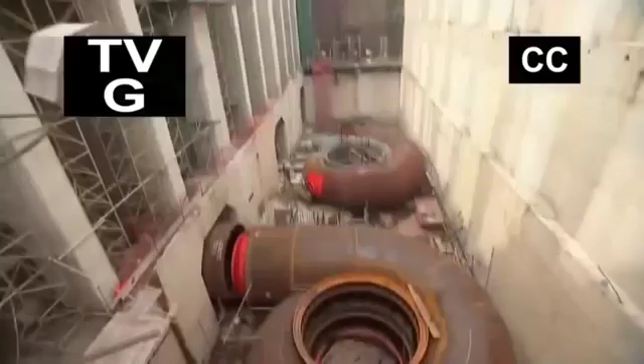As an architect, I travel the world investigating some of the most amazing design projects ever attempted. Right now, I'm going to take you behind the scenes of the most important construction project in Brazil. In the next few years, Rio will host the Olympics and the World Cup. But before the city takes the world stage, Brazil has got to fix a major power shortage. Brazil had one of the worst blackouts in history, leaving over 60 million residents without power nationwide. A crew of 3,500 is hard at work on one of the largest hydroelectric power plants ever built. To generate enough power, the team is taking a river with more water than the U.S. uses in a single day, and they're moving it.

If you hit a mountain, you go through it. Exactly. To reroute 16 miles of river, they're blasting their way through 7 mountains, creating the largest tunnels on the planet. So we've got to remove this rock obstacle. Yes. We're not using a shovel to do it, are we? With all eyes on Rio, Brazil is determined to keep the games from going black.

Welcome to Rio de Janeiro, the crown jewel of Brazil. Located in the southeast corner of Brazil on the Atlantic Ocean, Rio is home to 6 million people, the second largest city in South America. This city is famous for Carnival, the single largest party in the world, samba dancing, and Christ the Redeemer, the enormous iconic sculpture perched atop Corcovado Mountain.

Soon, Rio will be known for something else, as only the 3rd city in history to host both the World Cup and Olympic Games back-to-back. The entire world will be watching this city when over 4 billion people tune in to see the games. The problem is, Rio may not be ready because this city suffers from blackouts. Just 1 month after winning their Olympic bid, Brazil suddenly went dark in one of the largest blackouts in human history. For 5 hours, 60 million people were without power. With 750,000 tourists attending the games and over 2/3 of the planet watching on TV, the people of Rio are desperate to keep the lights on.

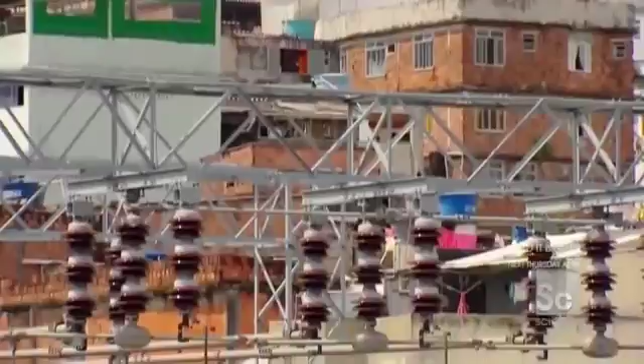So as someone who's from Brazil, what does it mean to be a part of this bid, of this Olympic Games? That's a unique opportunity, right? Because if we didn't win this time, it wouldn't be probably in my generation that this opportunity would be open again. So this is a bigger event than Carnival? Way bigger. Carnival's the biggest event in Rio. Yes. So this will be more lights, more people. More lights, more people, more tourists, more buses, more infrastructure running the system.

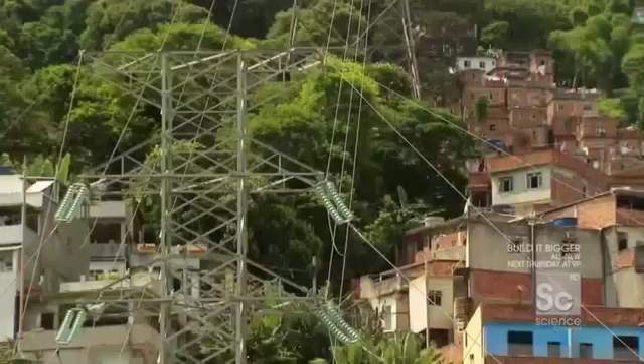Yes. The city has less than 4 years to generate enough energy to power 2 marquee events. Their solution lies 3 hours north of the city, where they're building a massive hydroelectric power plant deep in the mountains.

So I've just arrived in the town of Sapucaia, and I'm about 100 miles outside of Rio. And this town, sitting on this body of water, that's the site for the new hydroelectric project. One of the largest infrastructure endeavors on Earth. The Anta and Simplicio project is a job site larger than Manhattan. Workers here are reshaping some of Brazil's most difficult landscape in order to harness the energy from this, the Paraíba do Sul, a nearly 700-mile-long river that will supply the hydroelectric plant with enough water to fill 1,000 football stadiums.

But the location of the river is the project's greatest challenge. Now, the issue is if they put the hydroelectric plant right here, the reservoir required to feed this plant would cause a big flood. A flood so large that it would destroy all of the forests here and require this entire town and 2 others to have to relocate. So instead of moving the people, what they're going to do is move the river.

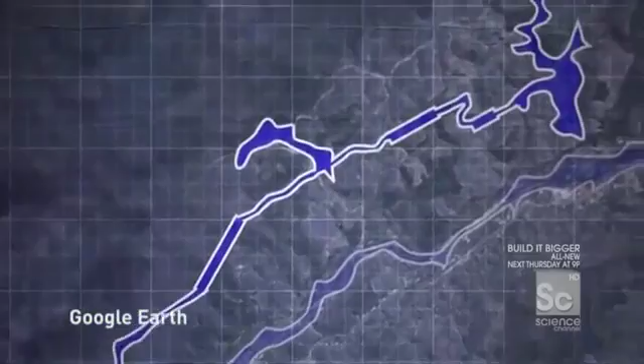To save the town of Sapucaia, engineers are doing something incredible: changing the course of 16 miles of this winding river in one of the largest water-moving efforts since the Panama Canal. Starting with a dam, they're diverting the river through 13 canals, 5 reservoirs, and tunneling through 7 mountains. Water will safely flow towards 3 of the most advanced turbines ever built.

So the concept basically is you have a river running here, but you need to put it over here. Yes. In between there are mountains and valleys. If you hit a mountain, you go through it. If you hit a valley, you build dikes. Exactly. Simple to say, the concept is simple. Build is very complicated. Very complicated, I imagine.

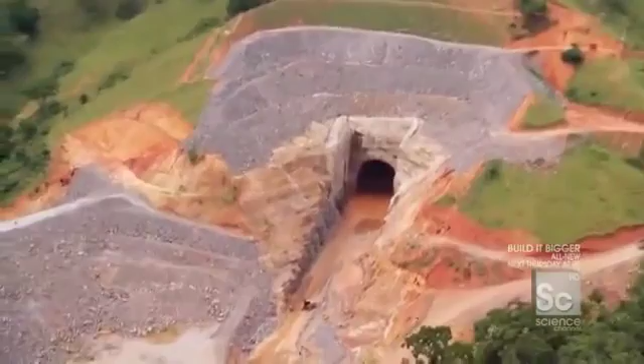In order to handle 780 billion gallons of rushing water, these tunnels need to be some of the widest ever created. If they're too narrow by even a few feet, the water could back up, causing a devastating flood. Right now, I'm heading into the mouth of tunnel 3, the very largest tunnel.

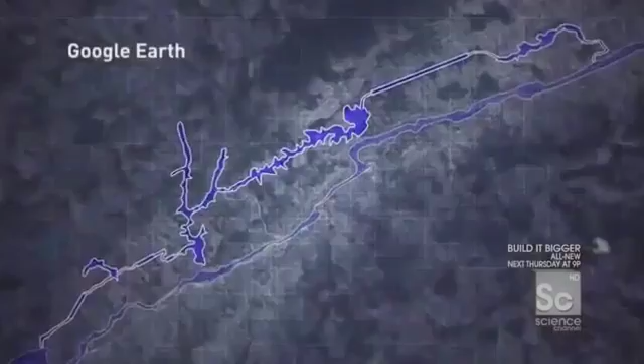Having been on a number of tunnel projects before, I have never seen a mouth of a tunnel this big. This is the longest of 7 tunnels, spanning nearly 4 miles. The further you drive in, the farther you get from daylight, and the darker and weirder it gets. In total, workers have to remove over 45 million cubic feet of rock, enough to cover Central Park in over a foot of earth.

With the weight of a 240-foot mountain above, the team has developed a safe way to build one of the largest tunnels in the world. It's a 2-step process. Step number 1 is what you see they've already done. They've blasted out this entire 26-foot tall semicircle. The second step is to go straight down. So basically, we're going to drill holes and blast down an additional 26 feet.

Okay, so how many holes do we have in this field right here? Here we have 52 holes. 52 individual holes. And how much explosives are you putting into each individual hole? In the middle, we put 40 kilos per hole.

So when we're done today, this will look like that. Correct, exactly, yeah. We're not using a shovel to do it, are we? What we're using is a liquid explosive.

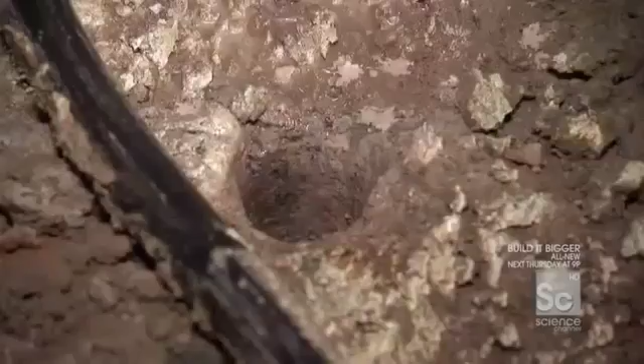Each 20-foot hole is filled with nearly 90 pounds of the stuff. So Marcel is holding a hose connected to a truck, mixing together explosive liquid. Yeah, it's a liquid, it's a mix. It's like you have to put in a little bit of oil, a little bit of vinegar, and you make an emulsion and it makes your salad taste good. This is different - it's not salad, it's a bomb.

Correct. Whoa, there she is. This kind of tapioca-like gooey substance is actually the emulsion - the liquid ammonium nitrate, the water, and the oil. This is a bomb, it's explosives. I have a hose full of it. Going down, all the way down.

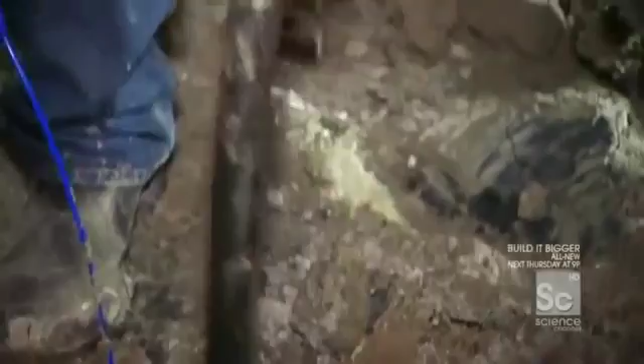Made on site, this explosive liquid emulsion is more stable than dynamite. Okay, I'm at the bottom - give me the juice. It fills all the empty space in each drill hole, giving the explosion the maximum force needed to break up the rock without causing a cave-in.

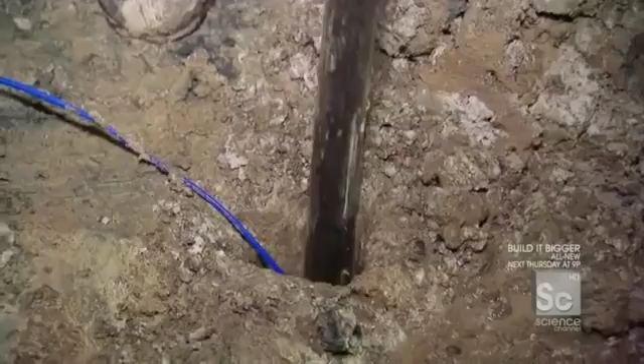So as the explosive comes out of my hose, we're slowly pulling it out, filling this thing up. Is it full? Yeah. All right, so now we have 52 individual holes, each and every one of them loaded with a fuse and an entire column full of this liquid explosive. Now we're gonna tie them all together and run away.

The holes are dug in 5 lines. Blast engineers connect the fuse in each hole with a series of color-coded time delays. Once detonated, each line of explosives blows up in succession. Like a wave, it pushes through the next 30 feet of rock.

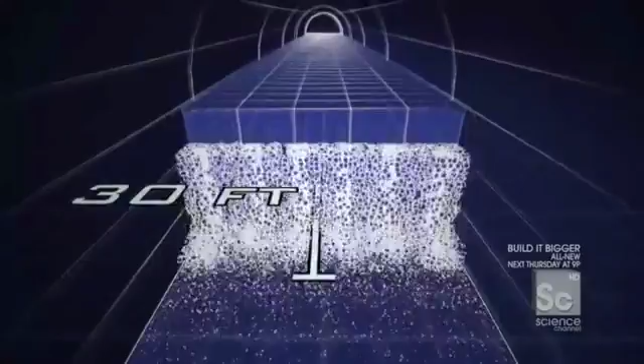Okay, so am I looking at the plan right now? Are we looking down? Yeah. So this isn't just one gigantic bomb going off? No, we cannot do this because of the vibration. If you explode everything, you will shake the tunnel. Bad idea. Yeah, it's not a good idea.

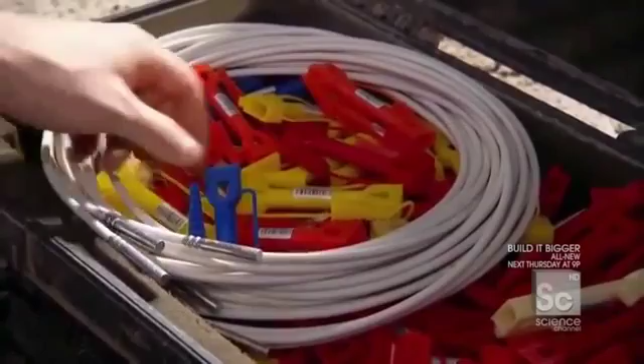Voila. Okay, so each color corresponds to a different delay. So which is which? 30 milliseconds, 150 milliseconds. And so basically by mixing and matching and combining these delays, we can kind of create the shape of the explosion we want.

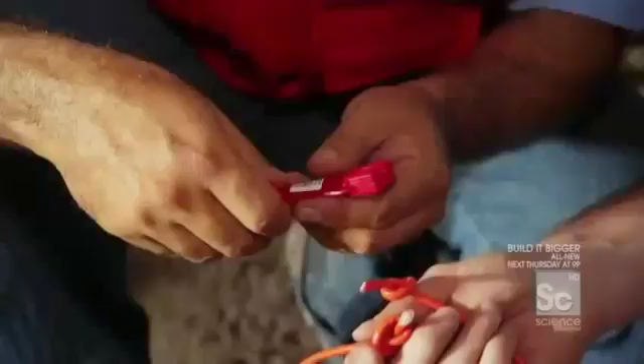Yeah, that's it. All right, Jack Bauer, let's do it - this is what it's about, right? Right below me is one column full of explosives. When it goes off, there'll be a 50 millisecond delay, and it goes on to the next hole. Stick it in, and now you can feel the wires touching the charge. And now I'll take this red piece, and it's in. Okay, live explosives - let's get out of here.

Okay, so we're gonna evacuate the tunnel. Yeah, getting all the lights, the crew, the gear, everything out. Yes, correct. But not everything is evacuating - the intrepid Danny Cam is gonna try and capture the moment for us.

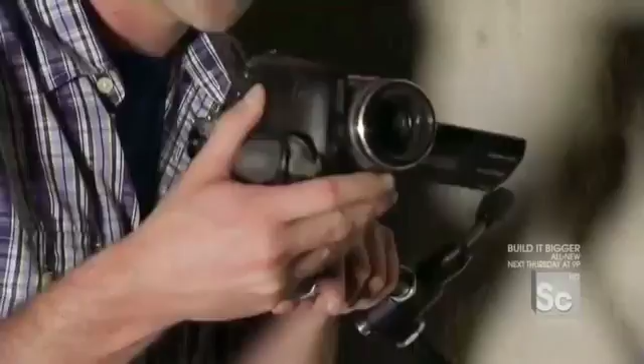You see, the last time we tried this, our camera did not survive the blast. Hoping for a bit better luck this time. All right, looking good. All right, you are set. All right, be careful where we step.

Okay, that's a bomb - that's another bomb. So in my left hand I have a stopwatch with 7 minutes set for the blast time. In my right hand, I have a lighter. Both are required to safely detonate a tunnel. So, okay, here we go.

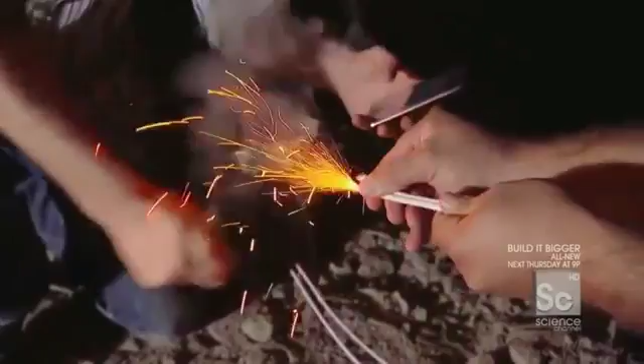Fuse is lit, fuse is lit. Come on, come on. Philippe, get in the back, hold on tight. Jay, get inside, quick. Philippe, you're good? All right, lights on. All right, here we go.

The mouth of the tunnel is over 2.5 miles away, making it almost impossible to reach in just 7 minutes.

We're gonna make a left here. Oh, good thing they told me that. Okay, gotta change gear. Sorry, dude.

Our only way out is a small access tunnel located a half a mile from the blast site.

This is ridiculous. So I'm actually driving as fast as I can, but the roads are really crappy. So the idea is, don't get a flat.

Oh, come on, come on. There it is, I'm almost there. I can see the light. A minute and a half to go. Come on car, come on. Get up there, come on, damn it. You okay, Philippe? Yeah. Woohoo!

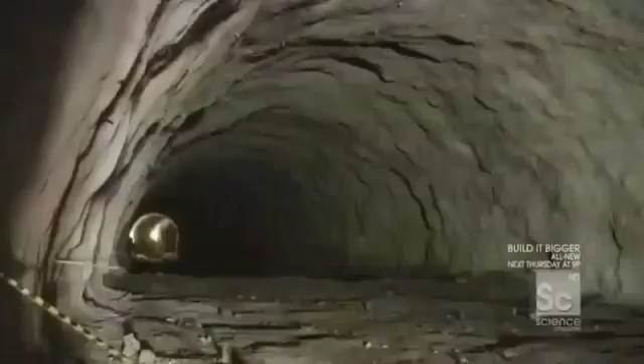That just went off the moment we got out of that tunnel. That was not 7 minutes. How many minutes? The phone jumped out of my hand, I was driving so crazy. 6? 5? 5. That wasn't 6.

That was. So the blast might have gone off a bit early, but the delays created the expected chain reaction of controlled explosions, putting them 30 feet closer to redirecting the river.

Coming up, what happens when one of the largest tunnel pieces in the world doesn't fit? I think we're stuck.

Brazil is the most visited country in South America. Tourism is one of its fastest growing industries, nearly tripling in the last 10 years. And Rio de Janeiro is at the center of it all, with an annual event twice the size of Mardi Gras. Carnival is the single largest party in the world, with over 700,000 tourists descending on this city, partying non-stop for 4 days straight. Now, to put this in perspective, during the Olympics, you'll have that many people and more in this city for not 4, but 16 straight days of events.

Imagine the televisions, all the air conditioning, all that samba dancing. The electrical loads on this city will be unprecedented. The Olympics will bring 750,000 more people to Rio, taxing an already strained power grid.

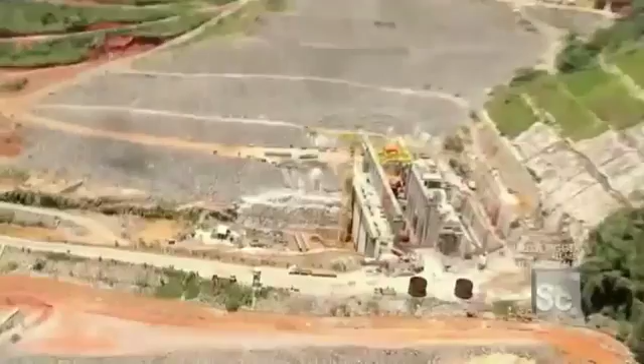To keep the lights on, the Anta and Simplicio hydroelectric project will supply nearly twice the energy that the city needs for the games. To generate that much power, workers are moving a massive river through a series of tunnels and canals, channeling all that water to an intake valve that directs the river to a powerhouse.

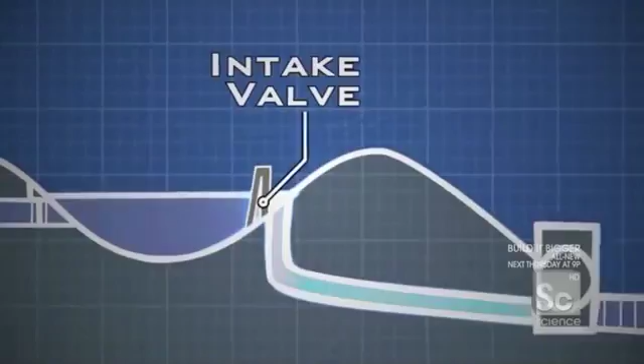As this enormous wall of redirected water comes out of the final canal, it now meets something called an intake, which is essentially like the drain at the bottom of a really big bathtub. But while the water drains out, something else has to hold back all that remaining water. Now we're talking about 780 billion gallons of water. What can hold back that much water? Well, it's got to be a really, really big wall.

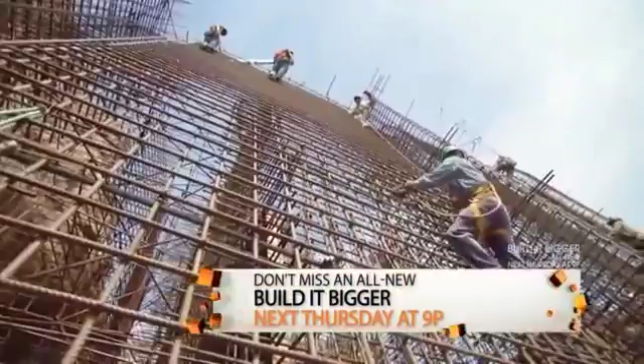This massive wall is over 100 feet tall, covered in over 4,000 tons of concrete. Its core is reinforced with nearly 75 tons of steel rebar, making it 100 times stronger.

So at this height, I'm basically at the midpoint of the intake. Water would be going in below where I'm standing, down into the hole. But up here, the wall that's holding back the rest of the water is right here. And the guys that are actually building this thing, giving it its strength, installing its rebar, well, they're doing that up there.

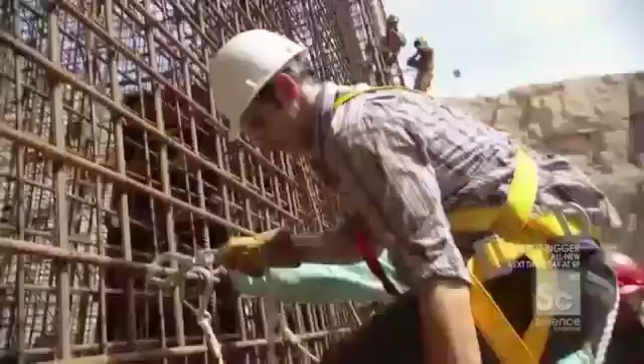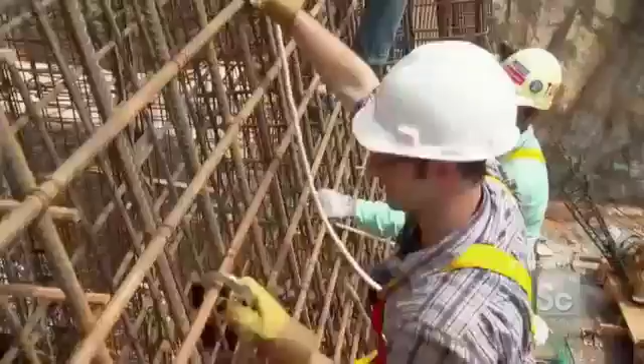Well, here we go. We're off. This is one of the hardest spots to reach on the entire job site. Workers have to climb a steep 79-degree slope. Not looking down, 10 stories up. Last couple, okay.

Woo! Top of the summit. How you doing? I'm Danny. Hello, who's this over here? Cleope. Cleope. Cleope. Cleope.

Cleope and Aldo are going to be my two teammates as we install some last bits of rebar on the very top of this wall. It's going to hold back hundreds of billions of gallons of water. That's a lot of water.

So the crazy thing is, at this height, at the very height of the wall, the way to get more rebar up to us so we can finish this wall is like that. There's no room for a crane at the top. So a team of 6 workers hoist each 65-pound piece of rebar using nothing but 160 feet of rope.

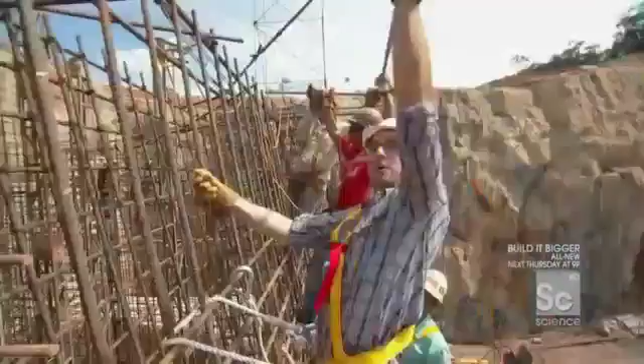All right, okay. Watch out, watch out, watch out, watch out. All right, come down, watch your shoulder. Come down by me. Okay, we're at the right height. And now that rebar is generally where we want it, now we put on a series of indomitable rebar ties to connect this horizontal piece to this vertical piece.

Around the top, when finished, this crew will tie together almost 5,000 pieces of rebar. Bring in the tool, twist. Creating a massive grid with over 17,000 joints that will stop a river in its tracks.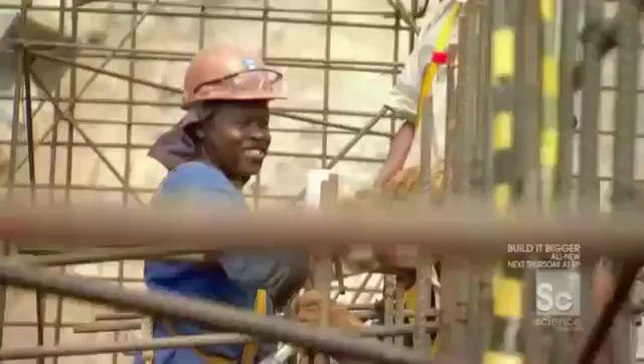So, why is everyone so happy? Why so much woo? Today is Saturday. Which means tomorrow's no work. No rules, got it. All it takes is a day off. Brazil just blows up. There it is.

My God, it's like a prison break out here. Well, it just goes to show just how hard these guys have been working.

6 days a week, almost 16 hours a day to build what will be one of the most important pieces of infrastructure ever to be built in Brazil. And why? To make sure this city, when it houses both the World Cup and the 2016 Olympics, doesn't have a blackout. Engineers expect a wall of water nearly 100 feet deep to barrel into the intake wall.

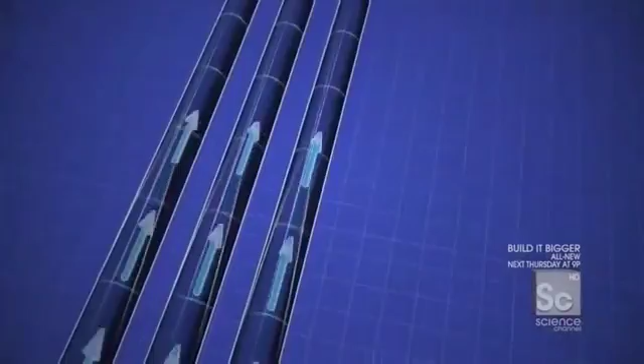After the water passes through, it drains at the base of the wall and enters 3 underground tunnels called penstocks, which begin with a 10-story drop to speed up the water. It gains momentum down a 7-degree slope, rushing towards the turbines. The faster the water, the more electricity they generate.

So that's the turbine down there. Yes. And the central idea with the penstock is to do what to the water? Increase the speed and the pressure. Both needed to move the turbines. And so the water's moving how many meters per second? 10 meters per second, so that's like 20 miles an hour.

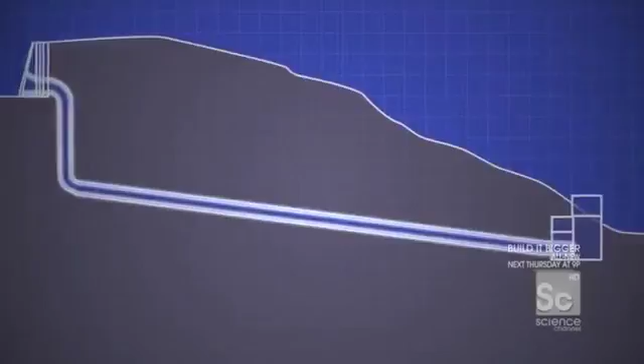Yes. Water moving that fast would tear away rock from the walls and ceiling. Its force is stronger than a massive ocean wave and capable of causing a tunnel collapse. To reinforce the penstock, workers line the final 350 feet with 50 massive rings, totaling 800 tons of solid steel.

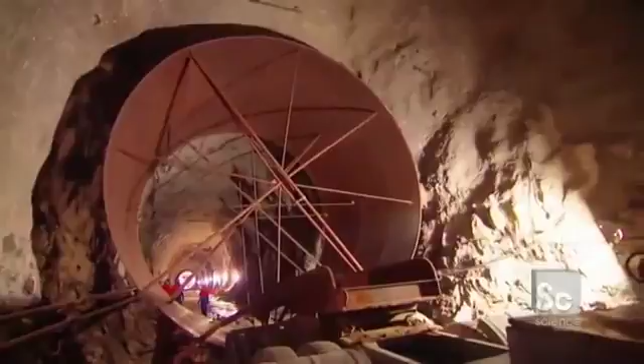Now, one of the fascinating parts of this process is they're moving a big, heavy object, but they're not using a crane because we're in a tunnel, right? There's no room for a crane. So rather than having a crane operator, we have a truck driver, and an angry one. Let's go meet him. All right, here we go.

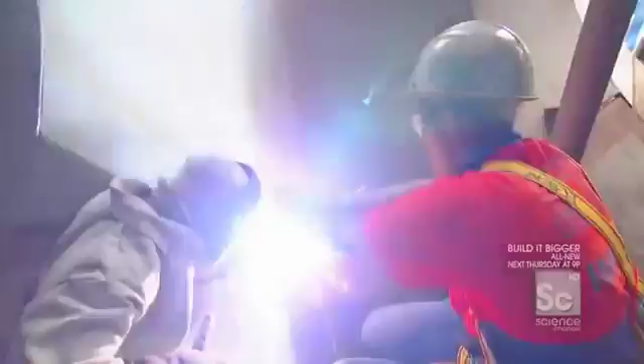Up next, sealing the most advanced turbine ever built with a 3,000-degree welding stick. Oh, sorry. Right. If you touch the rod to any metal.

Brazil is the 3rd largest consumer of electricity in the Western Hemisphere, with usage doubling in the last 25 years.

This country is turning to its greatest resource, water. There are many different ways to make the electricity we need to power our cities. You can burn coal, you can burn oil, you can build a nuclear power plant, you can have a wind farm, even a solar farm. Now, for a country like Brazil that has 1/5 of the world's fresh water, a water solution makes obvious sense.

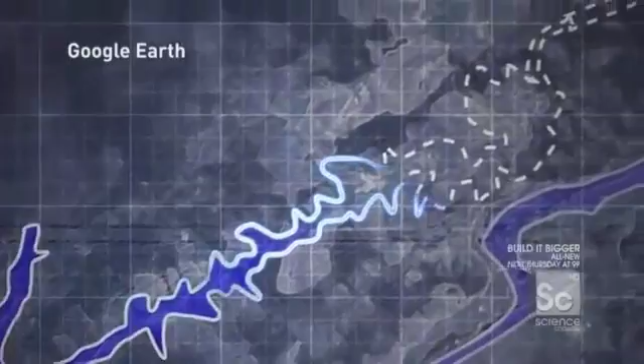The Paraíba do Sul is one of over 120,000 rivers in the country. And for the last 3 years, workers have cleared a new 16-mile path through 7 mountains, removing 650 million cubic feet of earth, all to bring that water to 3 of the most advanced turbines ever built.

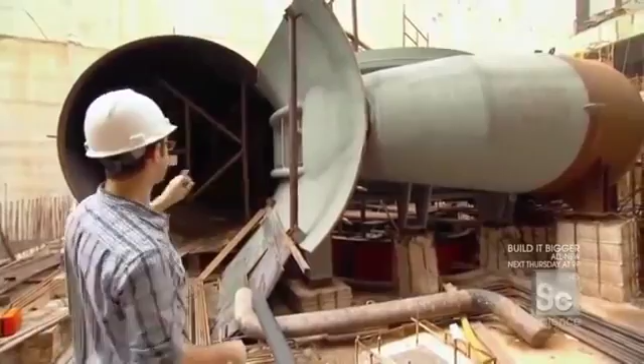We are now at the final leg of this race. The water, now traveling at its maximum speed, is going to come barreling out of the steel casing, which will ultimately connect to this right here. This thing behind me is called the spiral casing, and this is where the water finally makes electricity. It's going to spin around this, pulling a 360-degree turn, all the while rotating the blades of the turbine.

The turbine acts essentially like a water wheel. As water rushes around the spiral case, it pushes 13 angled blades, spinning the 35-ton turbine and generating power. The challenge is keeping the water from losing speed as it flows around the tube.

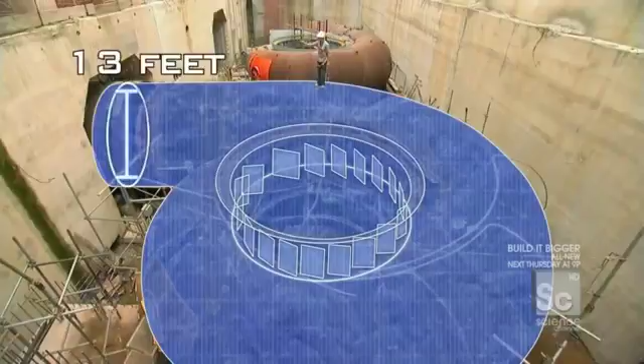The answer is the same thing we use when washing our cars with a garden hose. If you pinch the garden hose, the water goes faster, right? So if we decrease the diameter of the hose, we increase the pressure of the water. Same principle, just much bigger. The water comes into the spiral casing at a diameter of 13 feet, and as it goes around the curve, the tube gets progressively smaller, starting at 13 feet and ending at 4 feet. So when the water comes in, it travels the exact same speed all the way around the circle.

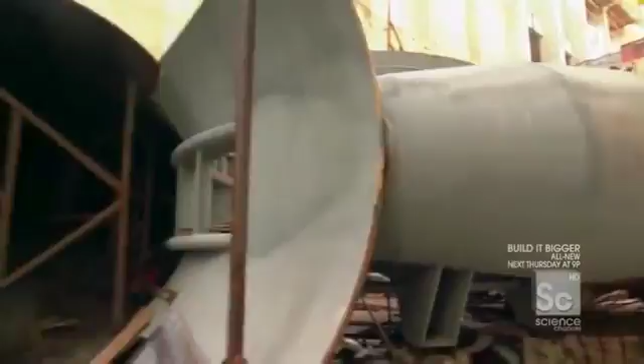The 62-ton spiral case is actually composed of 70 steel plates. Coming in, here we go.

To make the turbine spin evenly, it must be turned into one smooth, frictionless surface by a team of 4 welders. This is Cosme, one of the welders.

What Cosme's up to is he's welding on these pad eyes. We'll put one on this piece of steel, we'll put a second one up on another piece of steel, and we're gonna bring it together in order to close the gap between 2 pieces of steel, weld it up, and make it one smooth, curved surface.

Cosme's welding stick burns at 3,000 degrees, and to protect against flame and sparks, these guys wear welding jackets made of fire-resistant leather.

Okay, all right, you show me how it's done. Put one arm in, and then put the other arm in. Cosme, are you showing me how to put a jacket on? Is that how much faith you have in my abilities today? Right, if you touch the rod to any metal...

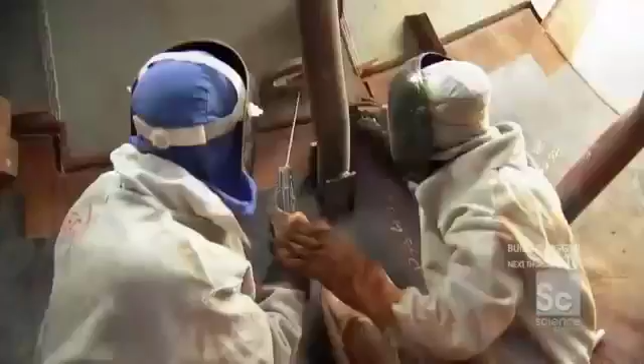These pad eyes are welded onto each steel plate to act like an anchor when they pull the steel together. All right, gotta get it in there tight. Get a nice little bead going right there. Good motion, look at that go.

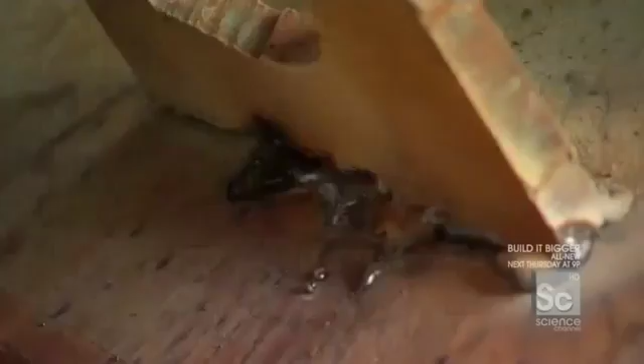These panels will be pulled so tightly that each pad eye must endure 18 tons of force. So we're gonna put more weld on it, and then the crew will finish it up. Next, the guys will put chain blocks onto that pad eye. Once we put tension in the line, we can pull the pieces of steel closer together, because in the end, they're taking these different individual curved segments and making one long curved tube that lets the water rapidly turn around and spin the turbine.

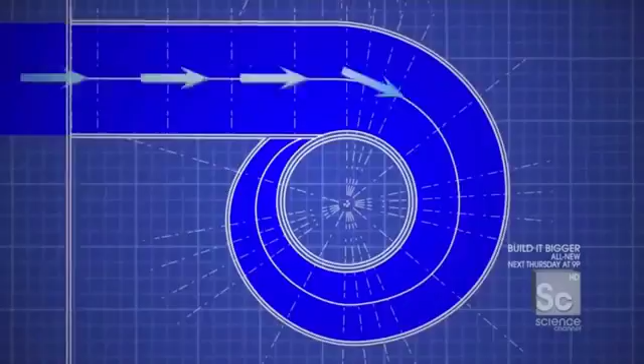79,000 gallons of water will rush through the spiral case, with nearly the same force as a rocket during liftoff, powerful enough to rip the 1-inch thick steel plates wide open. To prevent that, the crew must entomb all 3 cases in over 2,000 tons of concrete.

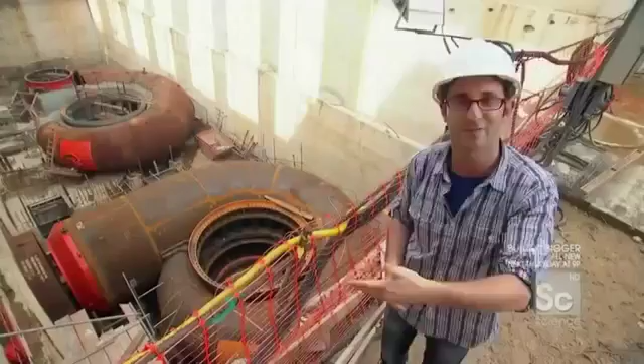But they have to first make sure the cases don't leak by filling them with water. The problem is, you can't fill it with water if you have holes in it. So right now, what we're gonna do is plug up the holes of that donut to let them fill it with water, using this big cylinder right here. The plug is actually a 32,000-pound steel ring.

All right, let's shackle it up. Once lowered into place, it will seal up the spiral case, making it watertight.

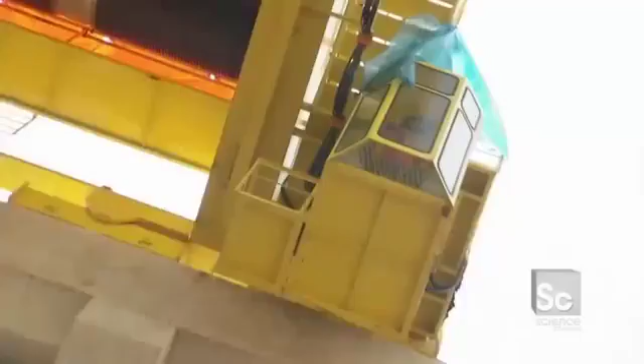Okay, so everything in Portuguese is different from English, even the crane operator instructions. So, for example, going up with the crane? Para cima. And for going down? Para baixo. All right, so he gives us a thumbs up. Okay, bring her up, here she comes.

16 tons, wide load. All right, clear the way, we're gonna start traveling.

One of the key things to keep in mind when you're flagging a crane operator, no matter where the piece is, no matter where you are, you have to maintain visual connection with them at all times. So as the piece moves, I have to move with it to make sure we're always looking at each other.

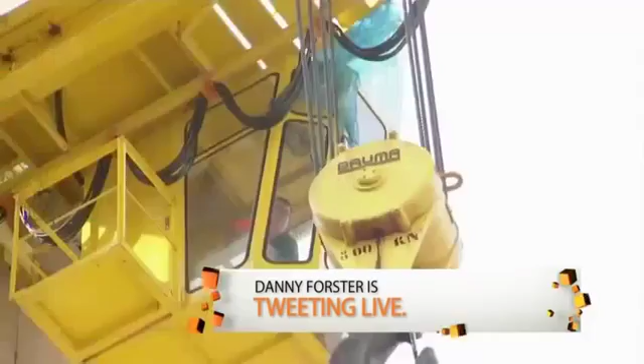And now for the delicate part, we're over top the spiral casing. Each spiral case takes workers 2 months to assemble. Very slowly. And if this solid 16-ton load falls, it would crush the case like an empty soda can.

Now I have the piece above the hole, there's moments of more progressive refinement. We got it this far, and now we're gonna get even closer as the piece gets closer to its final position. Okay, here she comes.

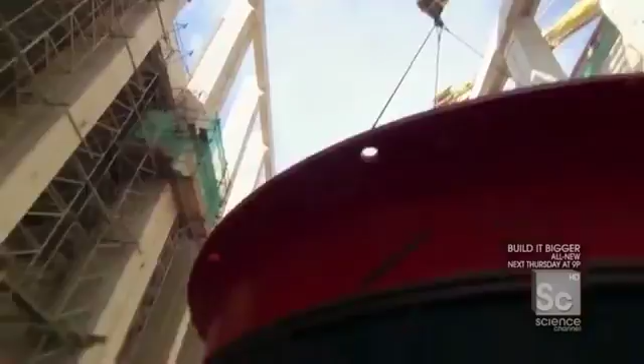Come on down. And now for the final few adjustments, here, literally, millimeter by millimeter. You can see it just going through the threshold with absolutely no room to spare.

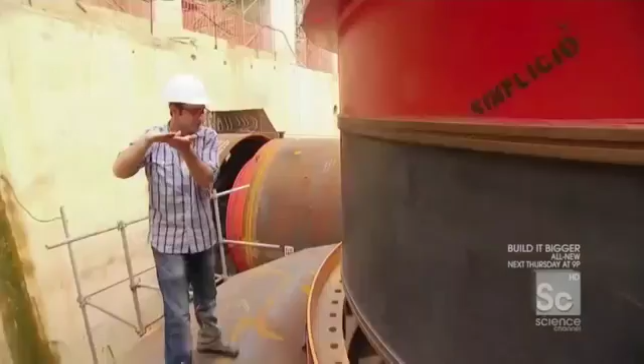Look at that. With only 1/64th of an inch of clearance and a crane operator perched 90 feet up this way, there is no room for error.

Come to me a little bit. Keep it coming. Stop it right there. Good. All right, so now we are lined up all around.

The circle should fit into the hole. Check it out. Everyone seems happy, so we're good. We're successful.

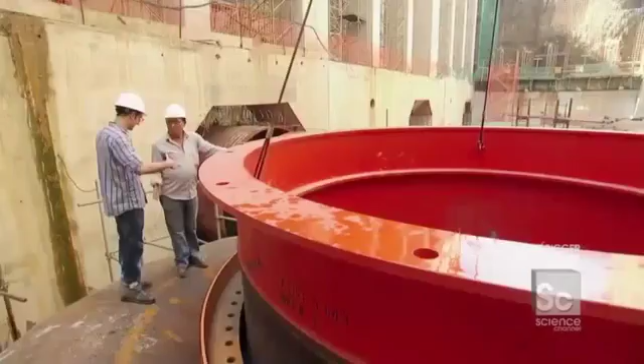My first time operating a crane by hand signals. Did a decent job.

Coming up, clearing out nearly 4 miles of canals. So these are the explosives right here. Calls for some serious firepower. Oh, the noise is so bad. You can hear it. It's like bomb-on-bomb action.

But first, how many hydroelectric dams are located in the entire country of Brazil? I'll tell you the answer after the break.

Here is the trivia answer. Brazil has 450 hydroelectric dams, more than twice as many as in the entire United States.

Rio has 1.3 million people living in slums called favelas. 20 years ago, these neighborhoods had no electricity. Today, their power comes largely from direct taps into city power lines, an extremely dangerous power source. But thanks to the 2016 Olympics, this situation is about to radically change.

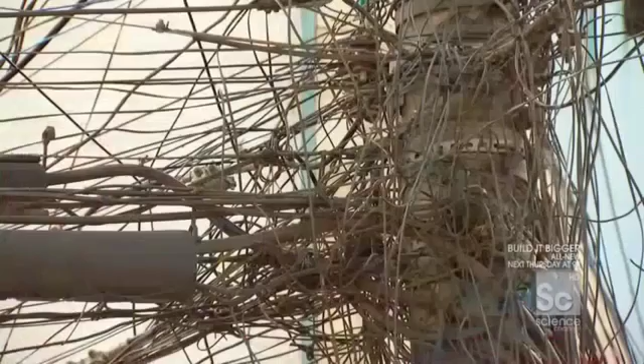One of the more fascinating reasons why Rio beat out their competition of Madrid, Chicago, and Tokyo is that winning the Olympics isn't just about showing off a shining, gleaming city, but rather it's also about using this as an opportunity to transform a place.

So this favela, one of the poorest neighborhoods in Brazil, is also going to benefit from the games. All the new infrastructure, all the new construction, all the new housing will affect this area. So winning the Olympics isn't just about sports, it's also about transforming a city.

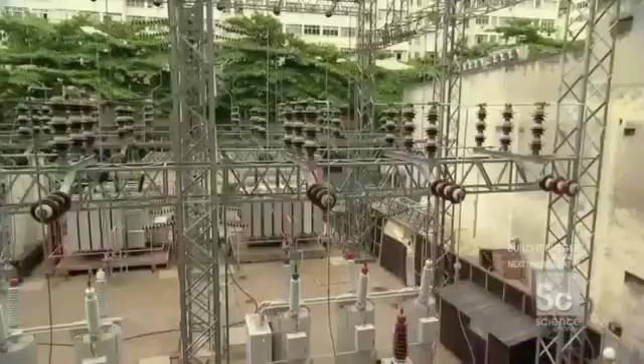Brazil is spending $14 billion on new infrastructure, changing not only the favelas, but the city's entire power grid, starting with Rio's aging open-air electrical substations. So Rodrigo, this substation is in downtown Rio.

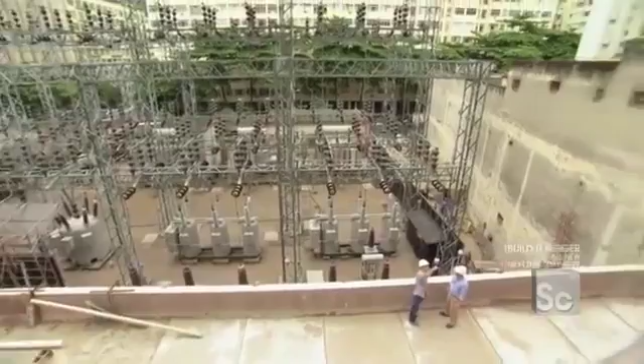I mean, for example, that's a condominium right there. That's an apartment building. People are living all around this thing. This is totally open? Yes. It's not good. It's not good.

It's very dangerous, this. But mainly, the problem is more vulnerable because you are exposed for birds, animals, and the ocean salt, raining. All of them would generate a blackout. So everything from salt from the ocean, the rain falling on this thing, even a pigeon could fly into the substation and the lights go out. Yeah, it's not a good situation.

This is not a good situation. The 3 transformers in this 50-year-old substation step down the voltage, making it safe for use in the home. They're being replaced with 3 brand new ones, much smaller and safer.

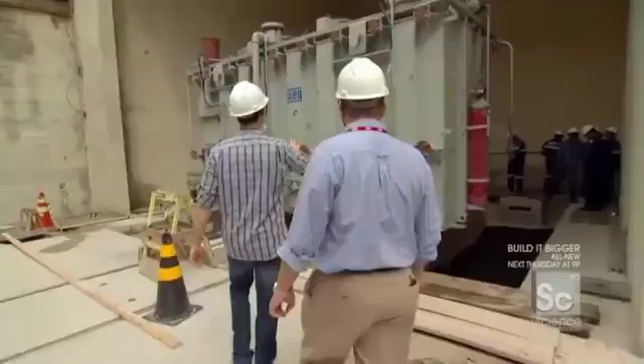And this, what I'm looking at right here, this is the actual transformer right here. Yes. So we have 3 of these, and they're able to make the same amount of power as this entire old substation. Yes, it's the same power, all of this substation inside this roof and all covered.

So it's smaller, it's more efficient, and it's covered and protected. I like it. Each transformer weighs 77 tons.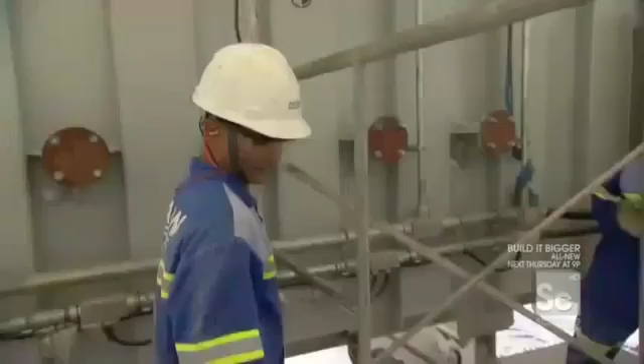It's not on, right? It's not going to electrocute me? No. And it took the crew and their truck 3 days to move it off the street. Now, just feet from its final destination, there is no room for a truck.

Okay, Guilherme, explain to me our situation, because we're standing inside of Transformer Bay. Yes, but there is no transformer. Not yet. But we're gonna pull this transformer, and you're gonna do this. I am gonna pull a transformer. Yes. By hand. My hands? Not your hands, I can help you, but I think you can do it. In order to do it, we're just gonna... Yeah, you just have to pull it. Just give a little.

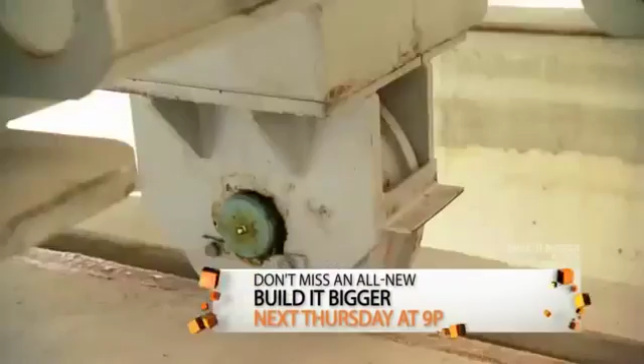Each transformer has to be dragged the final 17 feet using a ratchet pulley system. It weighs more than a tank, and each crank moves the transformer just 2 inches.

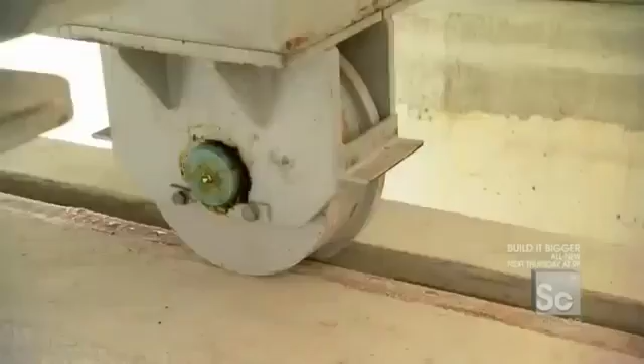It's like training for the Olympics here, in the transformer movement category. Is it moving? Do you need some help there? Come on, get in here. Okay, let's go. You want the gold? No, I want gold. Actually, it's like figure skating, they have the couples bridging.

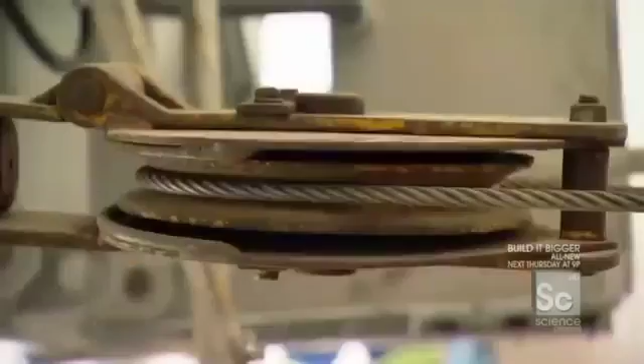It takes 102 strokes of the ratchet to cross the finish line. Looking good, there it is, transformer in place. Moved about 17 feet. How? On the backs of champions.

In the next 4 years, 50 more substations like this one will be upgraded, bringing power safely into homes. But getting the power to these substations presents an even bigger challenge.

Brazil is a country that gets almost all of its power through hydroelectricity, and it would make sense that a hydroelectric plant would be located where the water is. The largest source of fresh water on Earth, the Amazon River Basin, is in the far northwest of Brazil. But 3/4 of the population live on the opposite side of the country. Connecting the 2 regions is a massive network of power lines, spanning over 3,000 miles. The issue is those power lines are really expensive to build, they're inefficient, and most problematically, they're vulnerable. You're looking at a series of opportunities for blackouts.

Rio gets most of its energy from a power source nearly 1,000 miles away. But now, just 100 miles from the city, engineers are attempting to harness power from the Paraíba do Sul River by carving a new path to the water through 16 miles of mountains and valleys.

The 16-mile journey that the water takes from the dam to the powerhouse passes through 7 individual tunnel segments. There are 5 separate reservoirs, and here where I'm standing is the last and final canal before it goes into the penstock and into the powerhouse. The problem is, naturally, this canal is not wide enough to accommodate that much water.

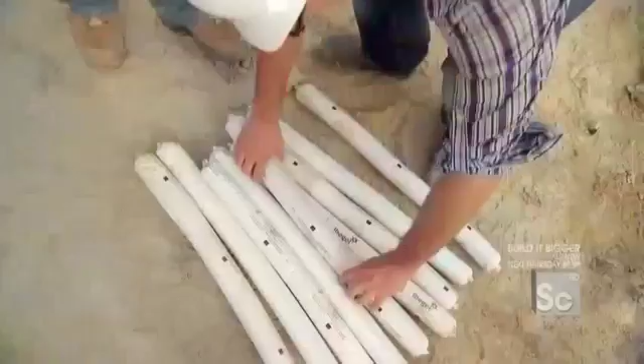30 feet deeper means clearing nearly 6,000 tons of rock. So these are the explosives, right here? They're using over 2,300 pounds of explosives, enough blasting power to hit a 2.0 on the Richter scale.

We're gonna lower this down the hole and fill it with these white sausage-like explosives, one at a time. Is it okay to drop them 30 feet? No risk, no problem. The noise is so bad, it's like bomb-on-bomb action.

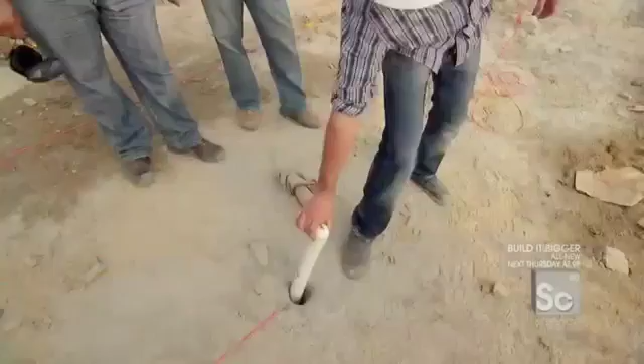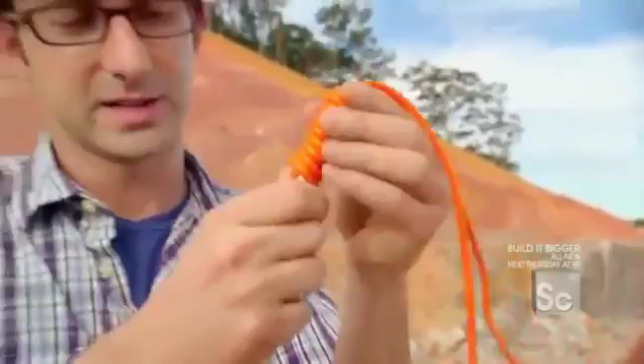We start running, and hopefully in about 6 or so minutes, this entire rock face on which I'm standing disappears. I got a fuse.

Coming up, we only have 3 minutes to escape from the biggest blast I have ever seen. We gotta go, come on, you okay? You're driving like maniacs, get out of here.

Just 1,600 feet of rock separate a river from this hydroelectric powerhouse that could end Rio's energy problems. Nothing that 1 ton of explosives and a fuse couldn't solve.

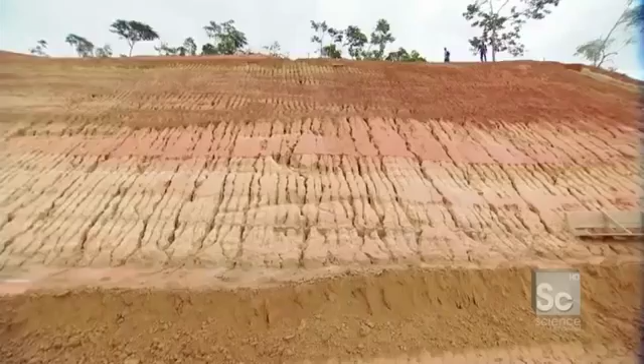To prevent rain from eroding the sides of the canal, should we head up? Yep. The team must spray the hills with hydro seed.

The homemade solution starts with water, soil, mulch, and a special blend of local grass seed. These are the seeds right here? Yeah, they have about 7 species. So it's this mixture, this blend of seeds that'll actually enliven the soil, give it some strength, and minimize that erosion.

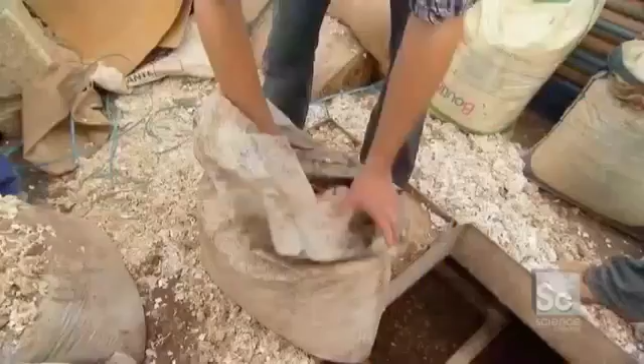Finally, they add a natural fertilizer. This is the good fertilizer. Yeah, this is organic, healthy. Is this poop? It's poop with soil, but it's organic, you know? Yeah, it's poop. Organic fertilizer. What do I think it was? It's poop.

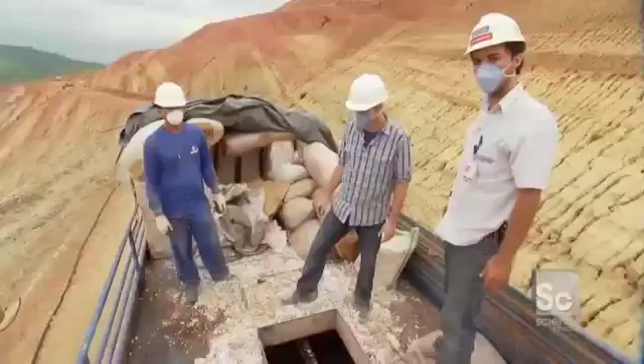All right, so we have our 7 different kinds of seeds, our 4 bags of mulch, and 5 bags of organic fertilizer. Are we done? Are we ready to shoot? Ready. All right, let's mix it up and shoot some seed.

Ultimately, the team has to spray hydroseed over 5 million square feet of land, nearly enough to cover Times Square. Workers use a hose with 80 pounds per square inch of pressure, spreading over 2,000 gallons of hydroseed in just 30 minutes. Here's the handoff.

Here's the handoff, I'm stepping in. Hang on, oh wait, it's taking me. My God, yeah I got it. Okay, it's like I'm fighting a freaking boa constrictor. Come on. Okay, I got it now. There it is, I got it. Don't make it a battle.

The crew has just 4 months to complete all the hydroseeding before Brazil's dry season sets in and the grass won't grow. So in just 2 months' time, I'm going to see plants that big? Exactly. And it's that grass planted on that hill that will keep this slope in place, minimize erosion, and let that water flow from this side all the way down towards the power station without interruption.

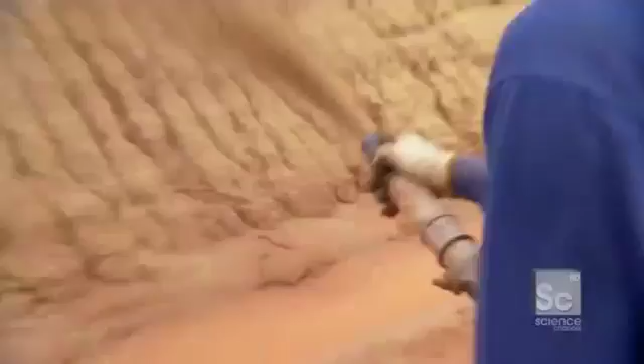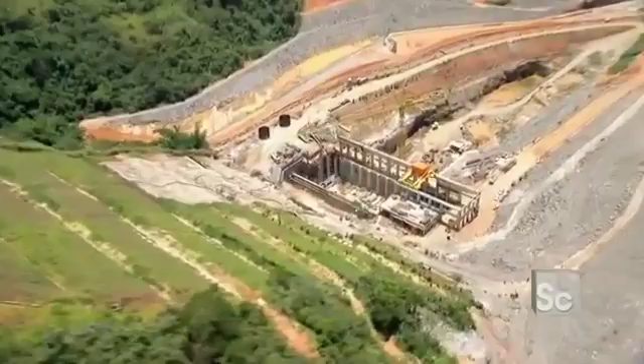This is one of the final steps in a 4-year effort to divert a river through an incredible 16-mile system of tunnels, reservoirs, and canals, all so that a powerful flow of water reaches 3 turbines, giving Rio the chance to show the world their incredible city during the upcoming Olympic Games.

Rio will be a radically different city as a result of these games. It's not just about sports, is it? No, it's much more. Actually, sport is the first driver, is what catches the attention, what catches the passion. But below that, there's much more happening.

Rio de Janeiro is going to host both the World Cup and the Olympic Games within a 2-year window. And because of this incredible honor, they're going to build new roads, new housing, and new infrastructure, and really change the city. But for me, what makes this hydroelectric project so exciting, even beyond the incredible engineering, is that they're going to give Rio not just the electricity they need, but also the confidence to hold these incredibly public events and do so without the fear of a blackout. And if Rio can pull this off, they're going to change not just the physical landscape of their city, but also the...